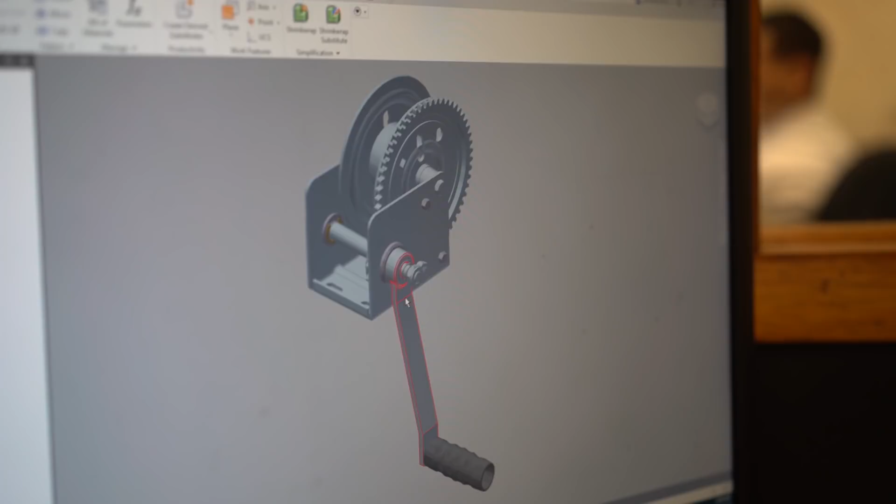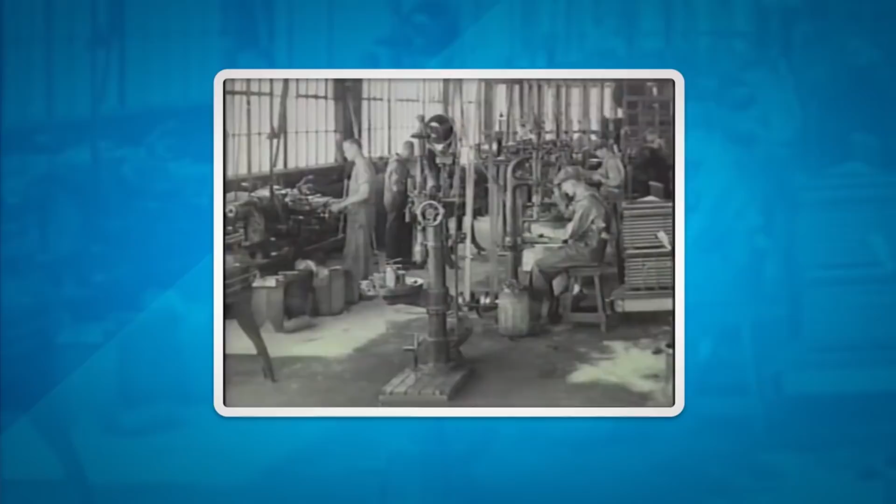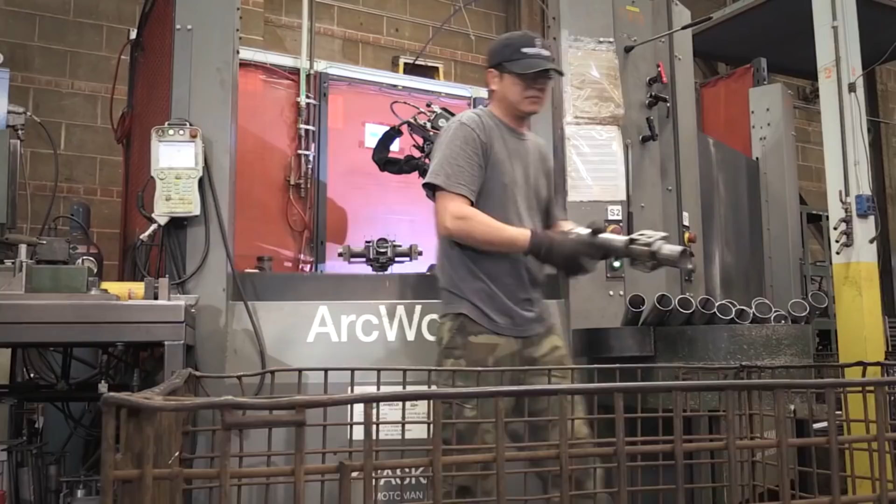In 1886, William M. Dutton and two friends started a small harness and horse collar shop right here in Hastings, Nebraska. 130 years later, the Dutton legacy lives on as Dutton-Lainson Company. While they're no longer making horse collars, they've become a leader as a marine products manufacturer and are one of only a few companies left in the United States that are all US made. They make thousands of products that go all around the world.

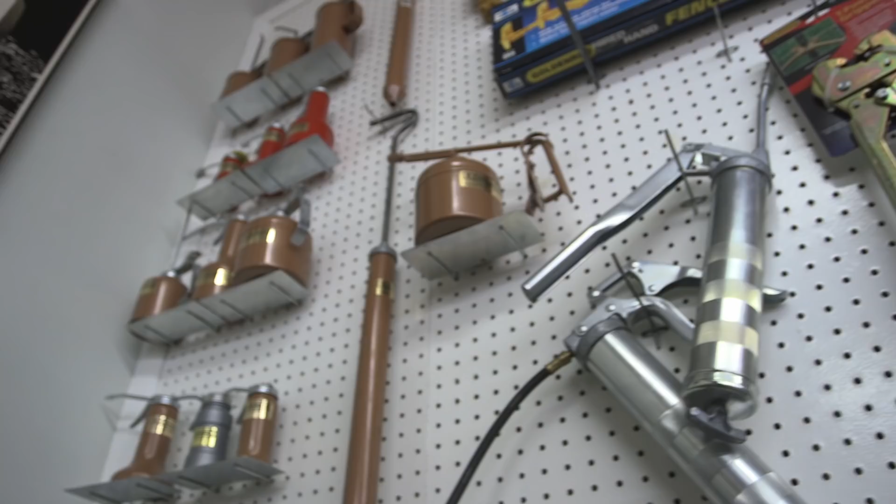Here at Dutton-Lainson, they make everything from tongue jacks to trailer hitches to oil cans, but what I'm checking out today is how they make winches, the tool people use to pull boats. They make all shapes and sizes of winches, and they're some of the best in the world. The brains behind these mechanical marvels are the engineers, and that's my first stop.

It all starts with an idea and a concept, which happens here in the engineering department. Engineers work to come up with design innovations that go on to become Dutton-Lainson's longtime products. I'm here with Zane, and he's going to tell me a little bit more about how he makes winches.

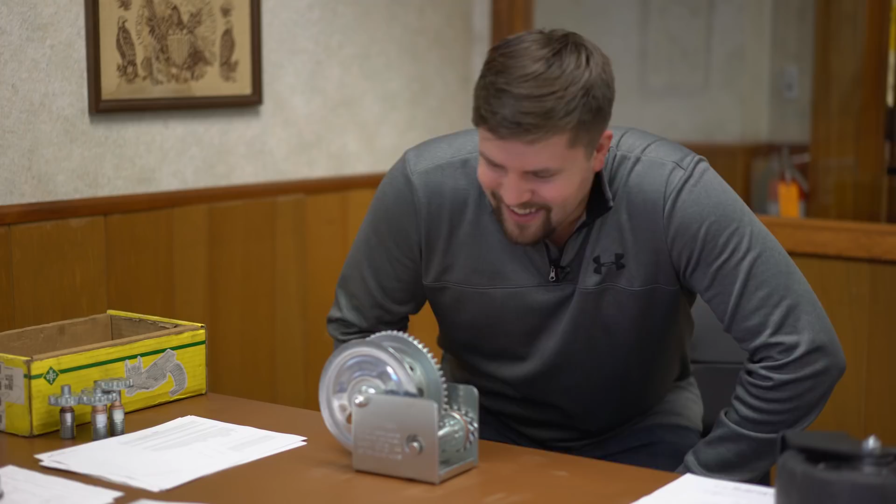How you doing? Hi, nice to meet you. Nice to meet you. So you make these things? So we don't actually make them, but we do design them in here. Okay, so we basically start the design process so that we can make a winch that they can produce out on the floor.

To make something like this, I'm guessing you needed a little bit of education. What kind of schooling did you need to learn how to make this stuff? I'm a mechanical engineer, so I got my degree from the University of Nebraska in Lincoln.

Education is important for an engineering career. Some other important skills to have include computer modeling, advanced mathematics, attention to detail, and communication skills. So if you're good at math and you're good at science and you want to make some good money, engineering might be the path for you.

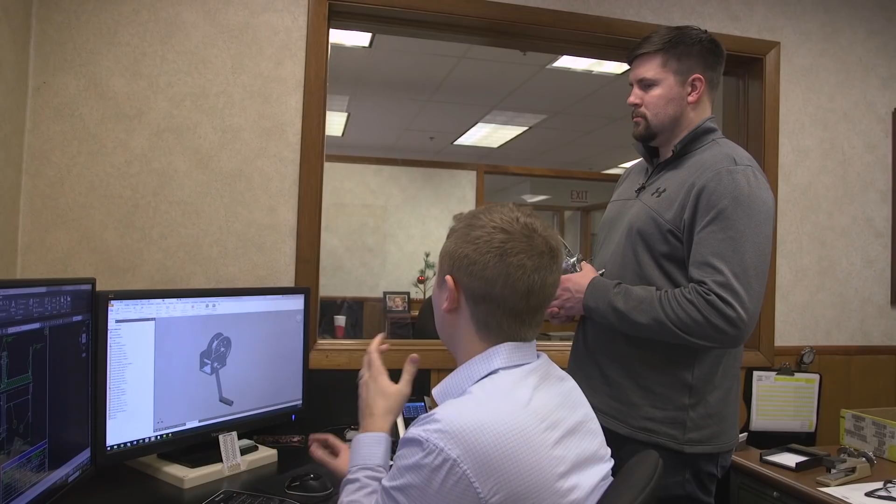Right. I usually use my computer for gaming, but maybe you could show me what you have on your computer? Yeah, absolutely. Zane walked me through the programs he uses to design the winches. All of the engineers work together to come up with new and better ways to provide quality products to their customers.

Engineering is a highly sought-after career according to CNBC's list of most in-demand jobs. Industry-wide, engineers can make between $60,000 and $90,000 annually with 3 to 10 years of experience. These jobs often require years of study, but with 140,000 new jobs to be added to the field between 2016 and 2026, those ready to work in areas like Zane will find low unemployment and high demand.

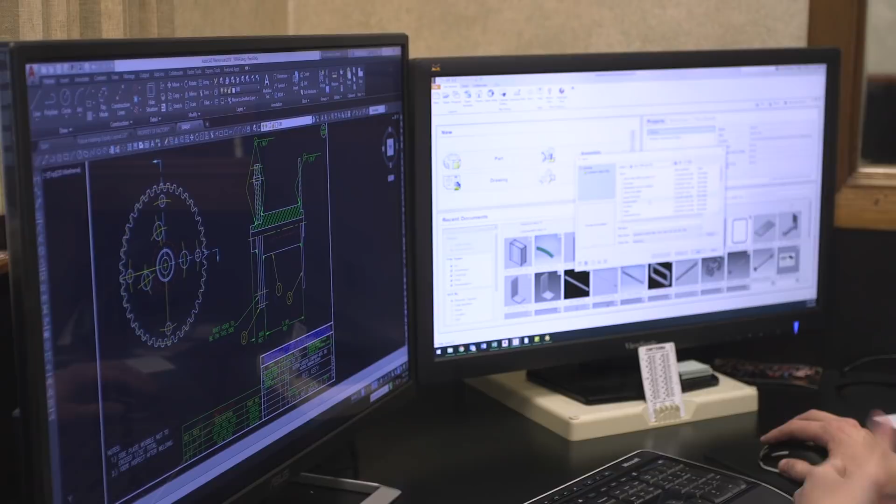Zane, your job is fascinating. It's way over my head, I'll tell you that, but it's so cool to see you making designs that become products. But I really want to see how they take your design and actually turn it into something, and where would I go to find that out?

You could go talk to Scott in the tool room and he should be able to fill you in on any information on how these actually go from this point onward. Well, I will do that. Thank you, Zane. I'll let you get back to work.

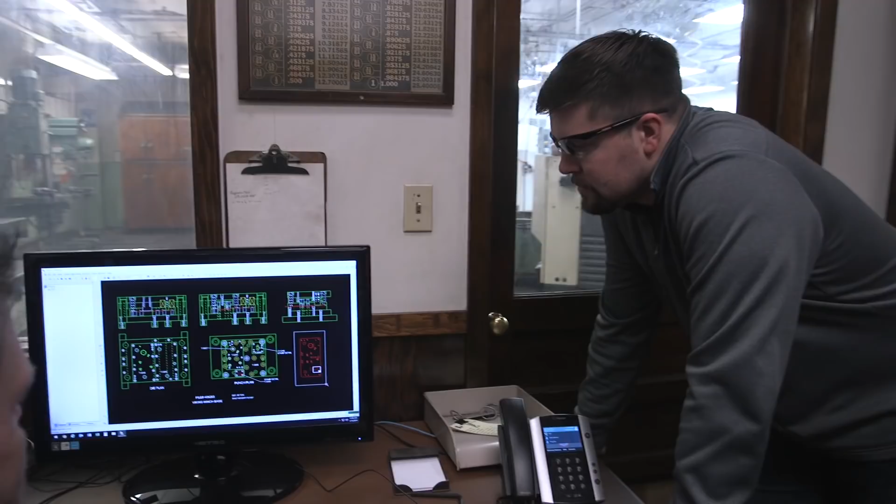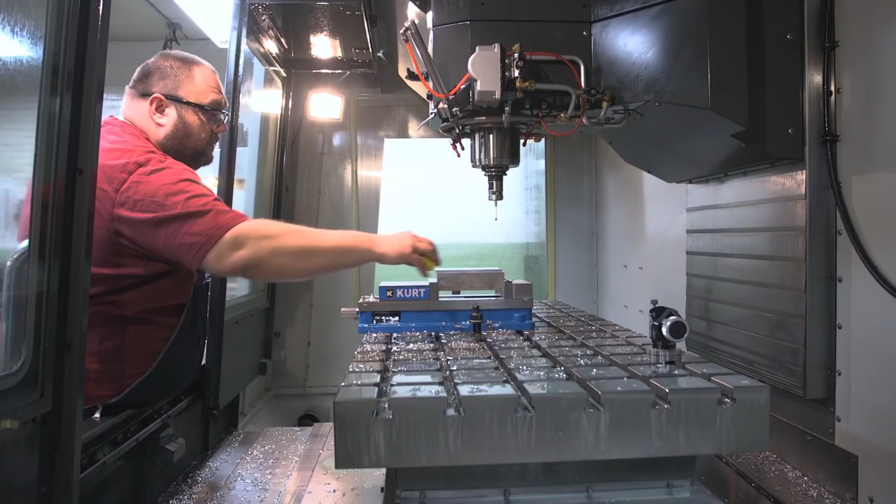Scott in the tool room showed me how they transform Zane's designs. They mark out the holes and lettering and create tools to be put into machines. These tools are constructed to exact specifications, so that when they mass produce products, every single part is the same. If you're the type that likes to work with your hands, the tool shop might be right up your alley. High school machine shop programs and trade school training are great steps to achieving a career in tooling.

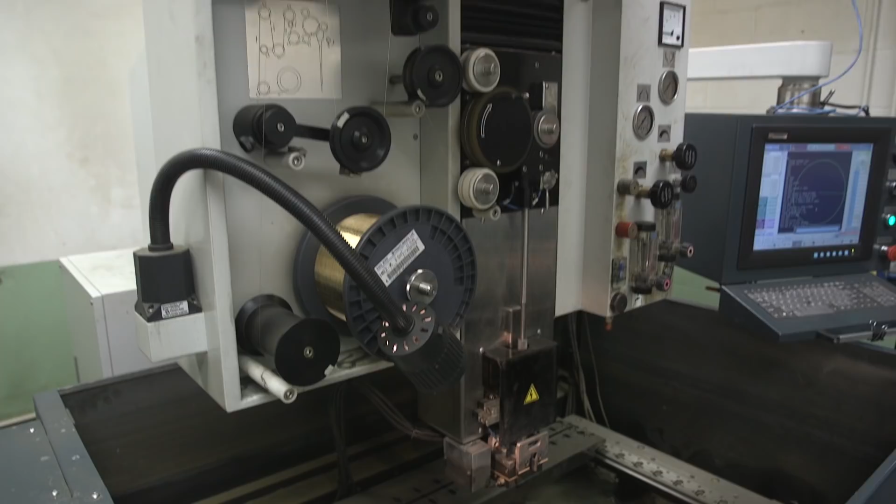Every product they make here at Dutton-Lainson, and every product you see on shelves, whether it's a cell phone, iPads, or TVs, has been touched by a toolmaker's hands. They had to make all the molds and dies to make these products come to life.

While I wanted to see these tools in action, I first needed to see how they're made. So, winch bottoms, do you have any options of working on something like that today? We got one back there we can mess with. Cool, let's do it.

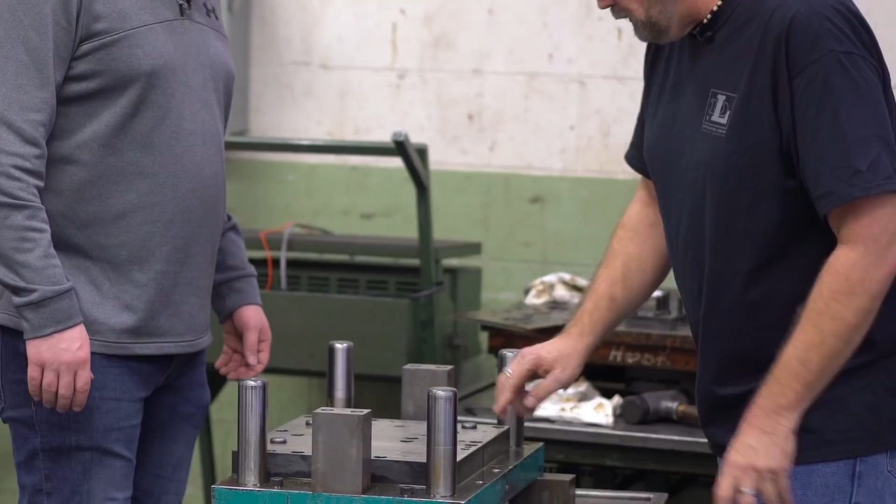That little red drawing that we had is this part right here. And this is a winch bottom, meaning? This is the base of a DLB 1,500 pound winch. Big one. Well, what we're going to do is we're going to pull these blocks off, sharpen them, and put this tool back into service. Sweet.

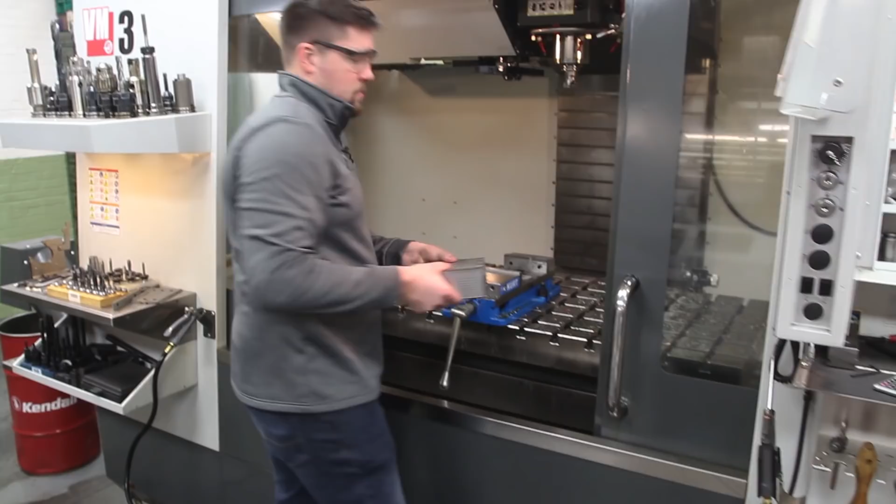I need to hit the gym a little more, I think. Well, you put it back together and nobody got hurt, and that's a good thing.

All fingers. After putting the tool back together, I was ready to check out how they use it to make parts. They do this in their progressive die building.

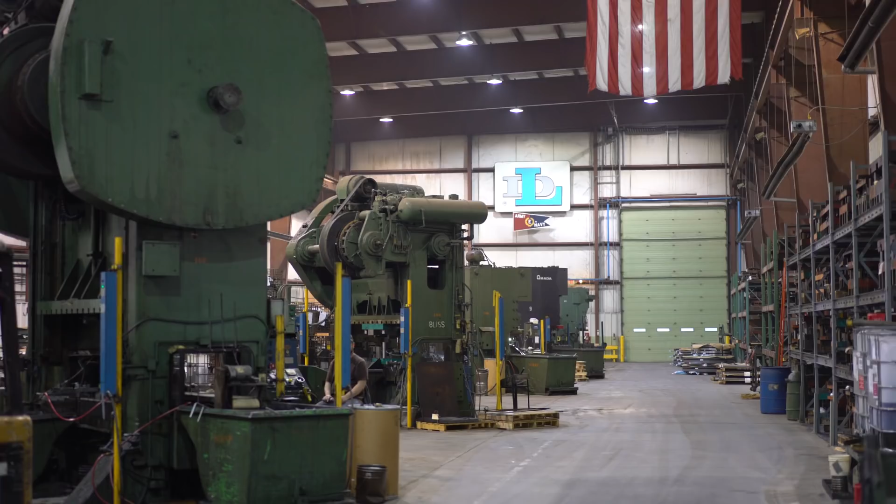Here at Dutton-Lainson, they employ hundreds of people from entry-level to skilled positions. In Prog Die, these workers use their skills to take Zane's design and the tool we made with Scott to produce the actual products. I'm here with Zach, and it's his job to run all these big machines.

So tell me a little bit about what you do. What is Prog Die? We take all the tools like you guys just saw in the tool room, and as you see these machines behind us, they make all the products you guys saw.

Zach and his team in Progressive Die are responsible for producing numerous components of the highest quality from a variety of progressive dies. Progressive die is a metal forming process widely used to produce parts for various industries. It consists of several individual workstations, each of which performs one or more different operations on the part.

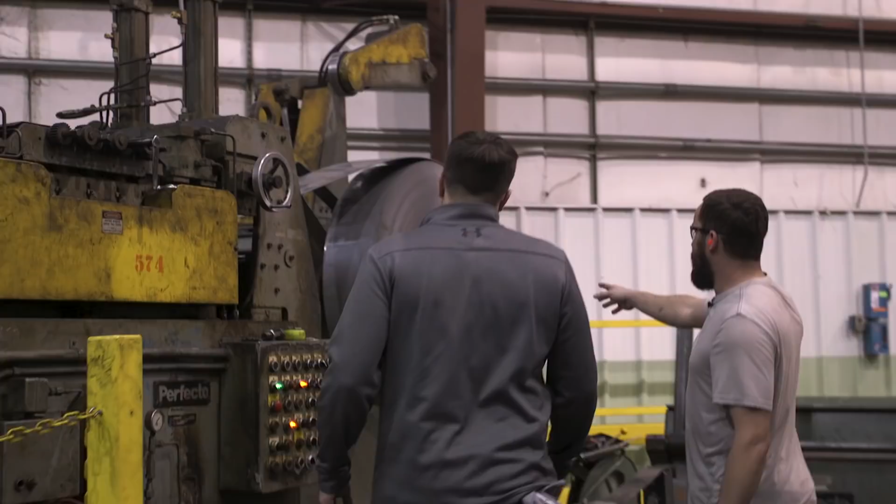So this massive machine can put 600 tons of force down onto a part. I don't think you want to get in between that. Pretty impressive. Using 6,000-pound coils of sheet metal, the parts are punched out of the strip and moved on to the next step in the process.

So all the scrap metal after the products are made go into these big bins, and then they're picked up by City Iron and Metal to be recycled and made into new products.

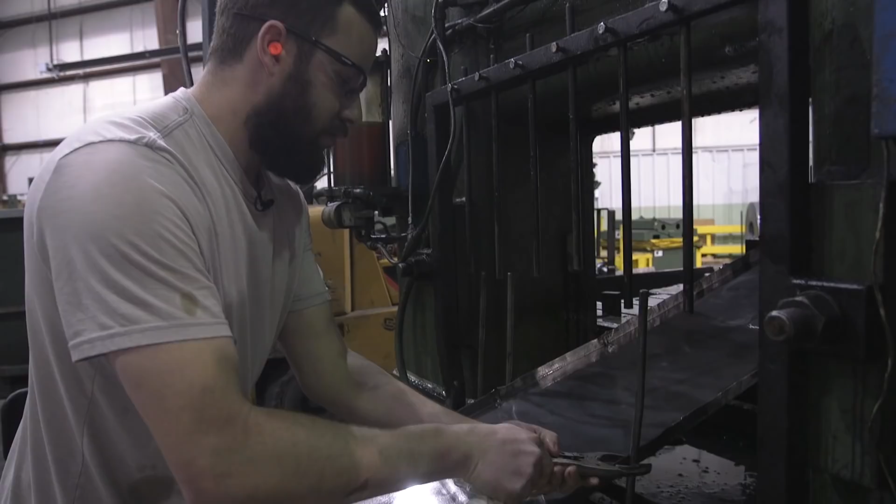A high school degree or equivalent is required, and general knowledge of progressive dies and molds, plus computer skills, is preferred.

All right, so what do we make? Made a winch base. And what's this become? Becomes a winch after it goes to assembly. So to see it kind of fully formed, I gotta go to assembly and check that out?

Well, I appreciate you showing me around. It's been awesome, greasy hands and all. I'll leave this with you and I'll go check out what they got in assembly. Sounds good. Have a good day. You too.

So once all the parts are made, they're sent over here to assembly to be put into products. It's our job to make sure that all the parts fit together and send out that final product. I'm here with Troy, and he's here to tell me what my job is today.

Yes, sir. Nice to meet you. I'm Anthony. Nice to meet you, Anthony. It's our job to take the products that you guys make and put them into this. That's correct. So what do I need to do to get started?

Well, we start from the head of the line right up here. If you got some gloves, I'll show you. All right, what we're going to do is go to the front, and I want you to be able to do this quickly and safely because that's more important than anything. We've already got you one started right here. I'm going to start this part, and then we'll do it together. All right, so I'm learning as we go here, right? That's correct. Okay, I'm going to give it my best shot. All right, so we are assembling the winch.

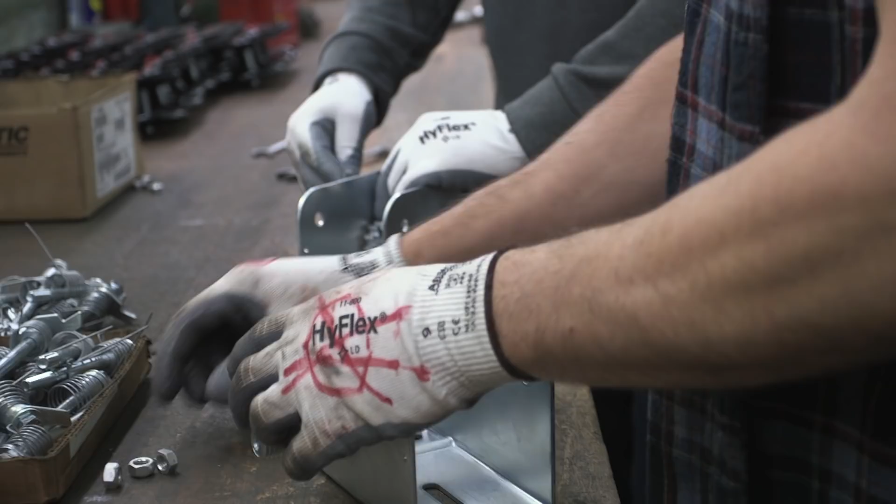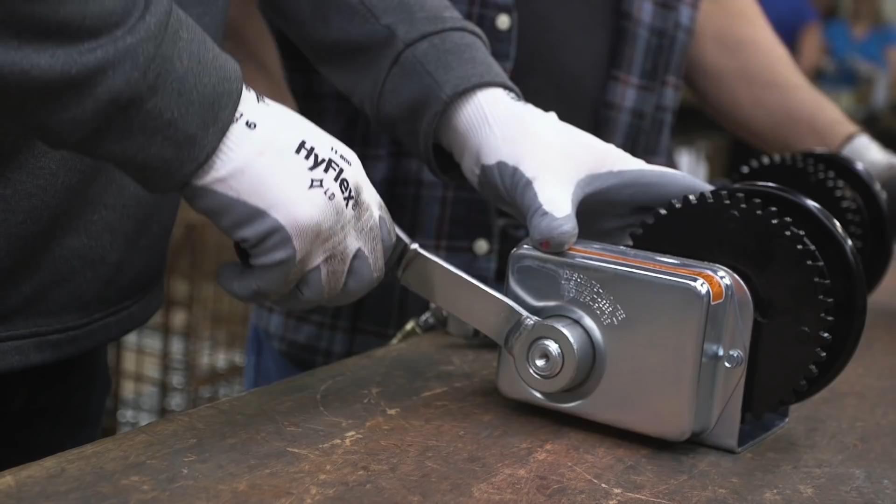All right, two done, on to the next spot. Now we take your nut. Is it good to ask questions? Absolutely. This one seems to be a little more skillful. It's magnetized, so it should stay nice in there for you, just a little bit of pressure. There you go, this way. Shows you the ratchet's working. And this works, that's right. I've created a working winch.

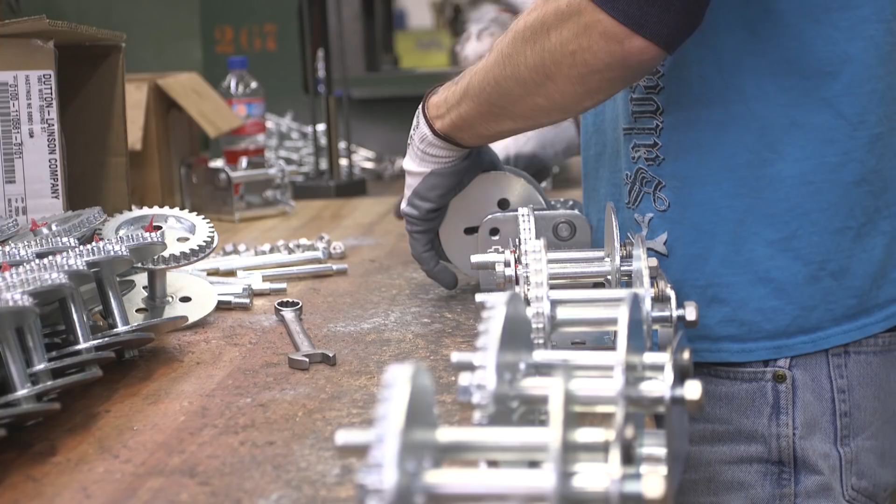You sure have. Someone working in assembly must be 18 years of age and possess general math and writing skills. Dutton-Lainson offers first-year employees 2 weeks of vacation with the opportunity to earn an additional week of PTO.

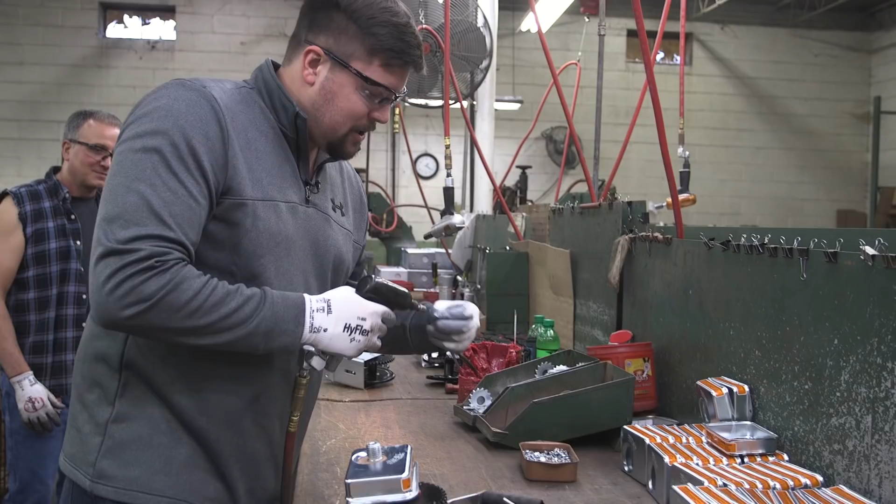You know, it's my first day, and I didn't know if I would be able to pick it up, but they're really good at helping you understand the products, what we're doing here, and teaching me what this is all about. I really appreciate that. It's really easy to pick up, and it's kind of fun. Just passing the time, making actual products that'll be out there someday. This winch I'm putting together right now will be bought by someone and put on someone's boat. So that's pretty cool.

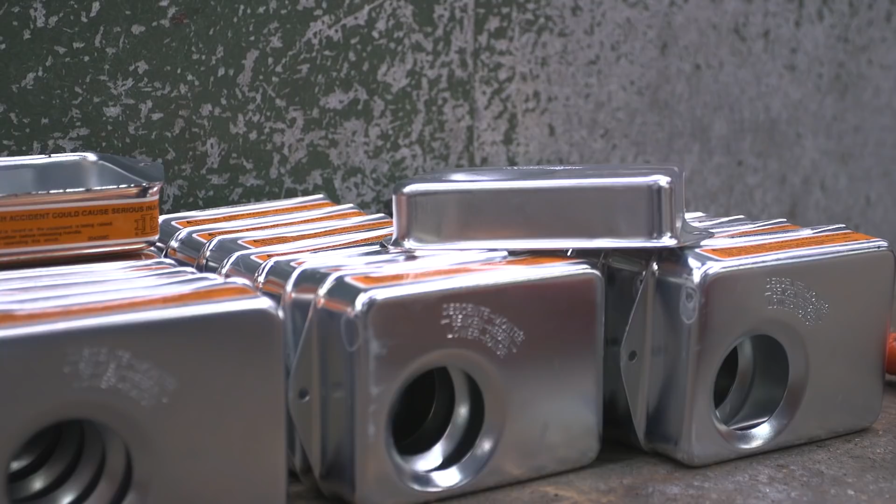All right, I got it all loaded up. Are we ready to ship it? You got it. Then we put a lid on it, we write a quantity down, and then we'll send it to shipping to Eric Paulson. All right, so if I want to see how these are shipped out, that's where I'm going next? That's right. Thank you so much for teaching me about assembly. I learned a lot today. Thank you, have a good day.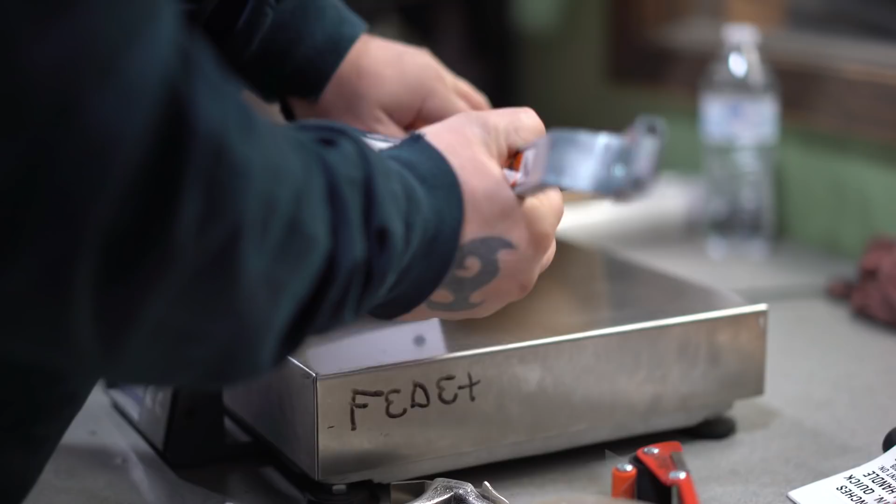So Troy said shipping and receiving is the last stop on the winch journey, and this is where they all come before they get shipped out. I'm here to meet with Eric, and looks like we got a box of winches just about to go out. So it's your job to make sure that everything's where it needs to be before it goes out to the customers? Correct. Dutton-Lainson ships out thousands of products around the world every week. Eric and his team are responsible for making sure every order is filled and sent to the correct location. They must also keep track of inventory, move products and raw material around the plant, and operate forklifts and pallet jacks.

Here's a very simple order, a small package. This is an order that a gentleman called in from North Carolina. He needs one handle. Bin location is E2. Well, I can go get this and get it on the pallet. Let's do it.

Eric put me right to work pulling orders for customers. The department layout and the organized inventory labeling made it easy to find each product and get them ready for delivery. My pallet and hundreds of others just like it leave Dutton-Lainson each day, going to customers around the world.

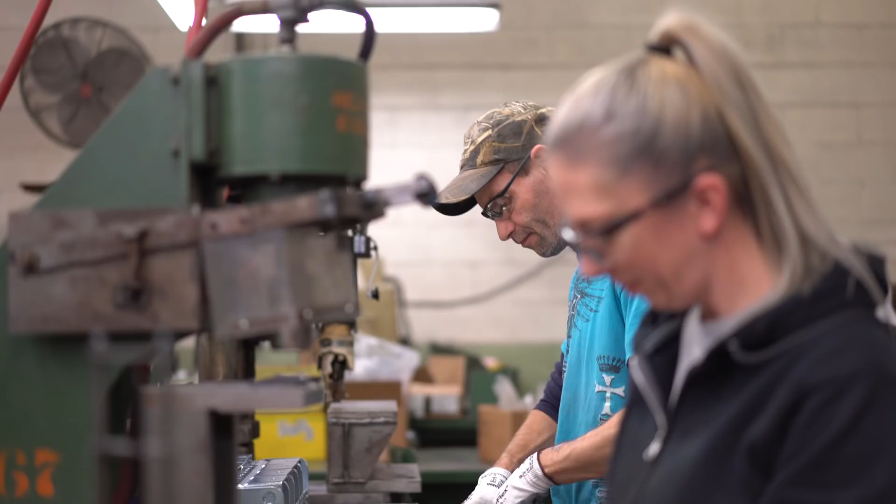All done. Shipping is my last stop on the Dutton-Lainson tour, and it was pretty impressive to watch a winch go from concept to tooling to production of each part, assembling them together, and finally here, sending them out the door.

That ends my day here at Dutton-Lainson, and this place is great. I had such a fun time working here today, and it's not just winches. They have thousands of products that leave here every day. This is a great family atmosphere to work in, and the company has such a great legacy, over 100 years of providing products right here in Hastings. Who knows? One day, maybe it'll be your job.